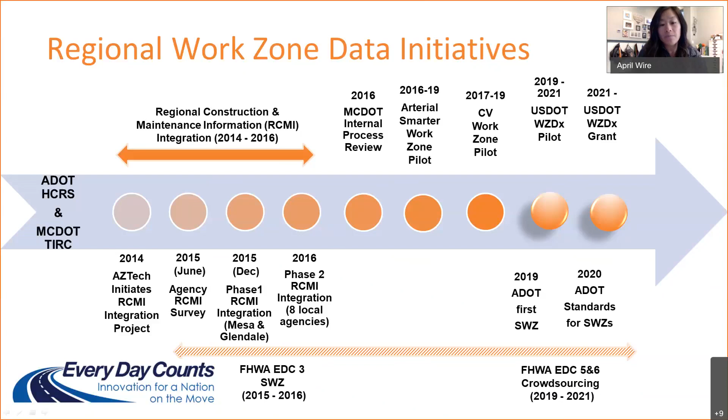As we talk about our work in the work zone space, we started working with many of our partner agencies through our AZTech platform, which brings together about 27 partners, including local agencies, cities, towns, Indian communities, universities, public safety, and the transit community, so we could focus on traffic operations, maintenance, and moving ITS deployments forward. One project we came together for was the Work Zone Data Exchange specification and deployment of a data feed ingestible by third parties.

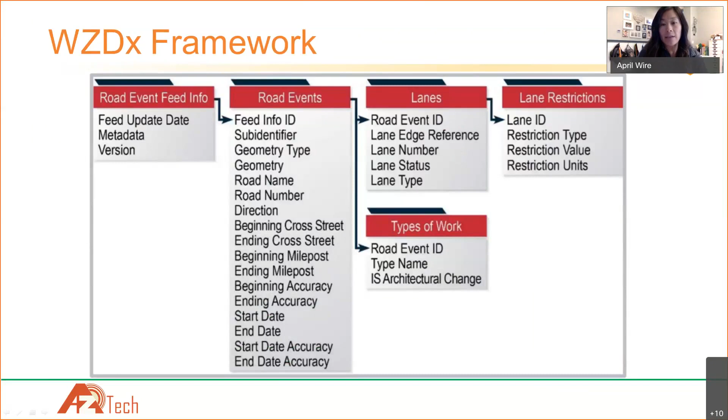In that WZDX framework, really pushed by USDOT and FHWA, here are some of the fields you'll find. It goes from basic information like where the location is, start date, end date, how many lanes are being dropped, or the status of the lanes, if they're open or closed, and any other relevant information that drivers might need as they enter into a work zone.

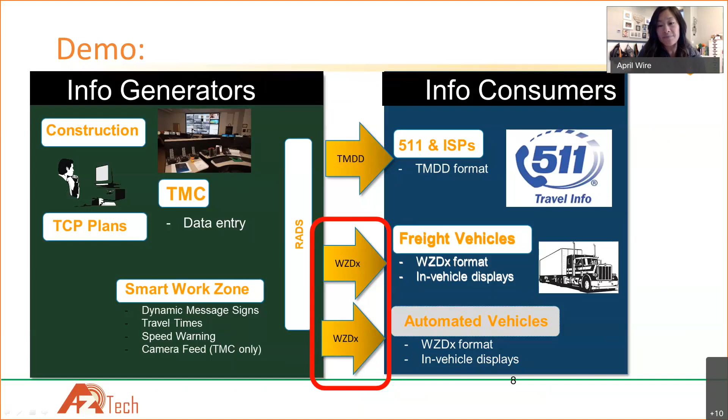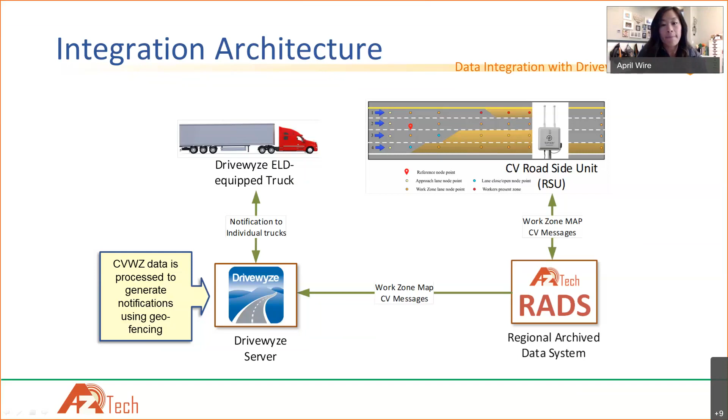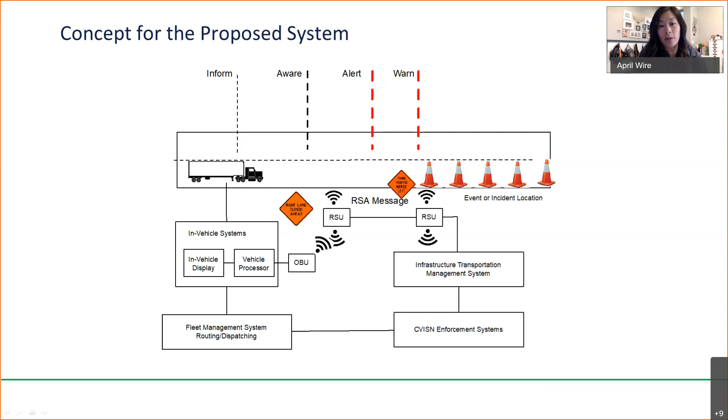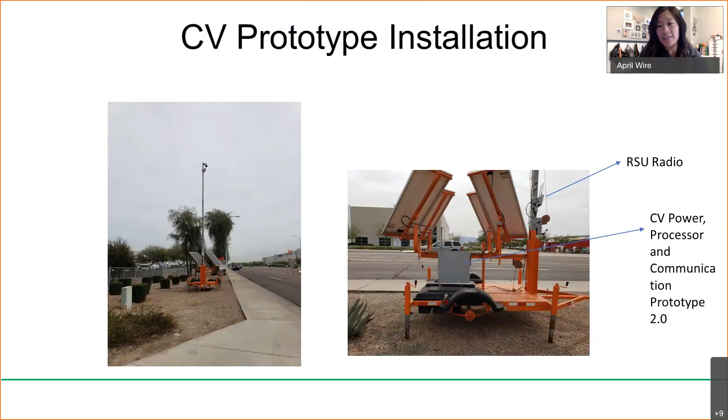There are a lot of different scenarios that we tried to test. One question always being, is the data collection required for each change in the work zone necessary, and how often do we need that information?

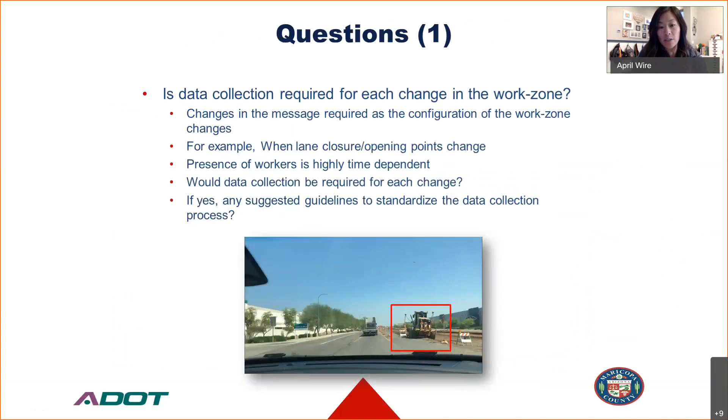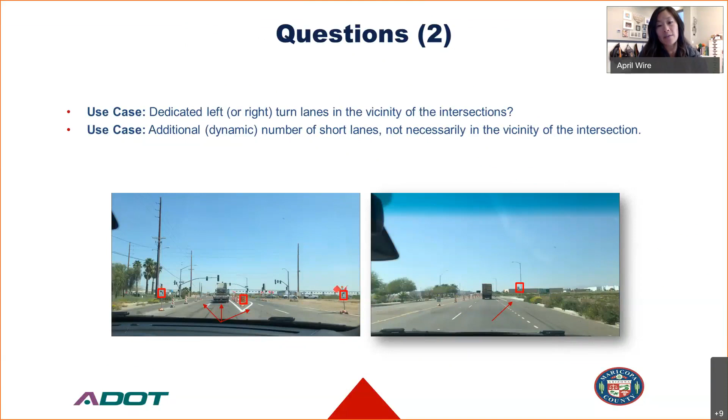And then the third question: is it a bidirectional lane or shared?

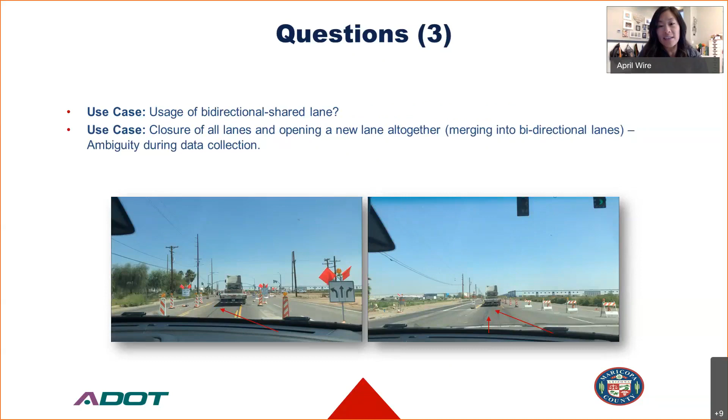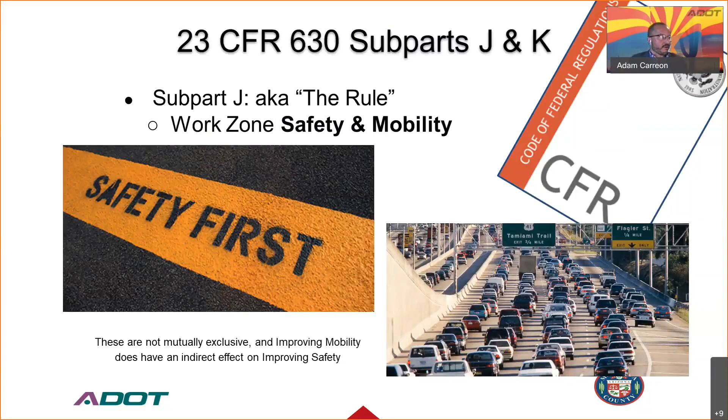So, I come at this from a work zone, actually more of a construction background, and I got first introduced to all of this through our work zone safety mobility program at ADOT. It's a federal requirement for the state DOTs. So this goes back to the backbone of how this started, at least on my end, and how a lot of states are getting into it, is the requirement for data. We want to make our work zones safer. So how do we do that? You have to collect data on them and then develop performance measures.

So the goal of collecting data has always been a requirement for, I believe, the last 14 years.

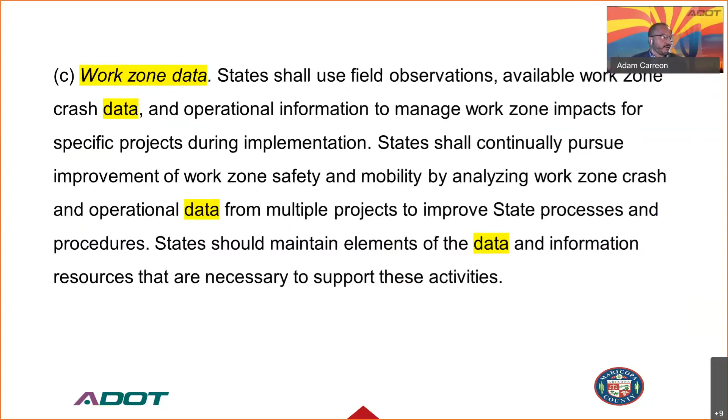So how do we then go forward? I've started presenting, and I would talk about the benefits of safety of work zones by doing smart work zones, by having data collected in your work zones. And a follow-on point for me to my initial audiences was, AVs will need the data. They'll need it at the very least to have a redundant system on what their cameras are picking up to verify what they're seeing. And so now it's almost coming around full circle where now I'm doing a lot more AV type presentations and circling back to the safety aspect. So the DOTs are collecting the data, they have access to the data, and so we need to be pushing it out.

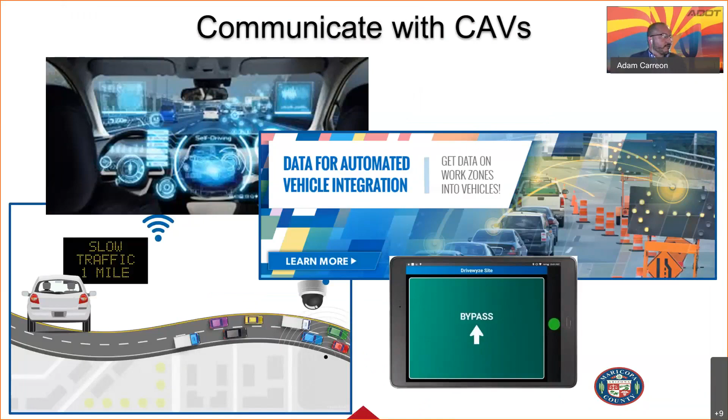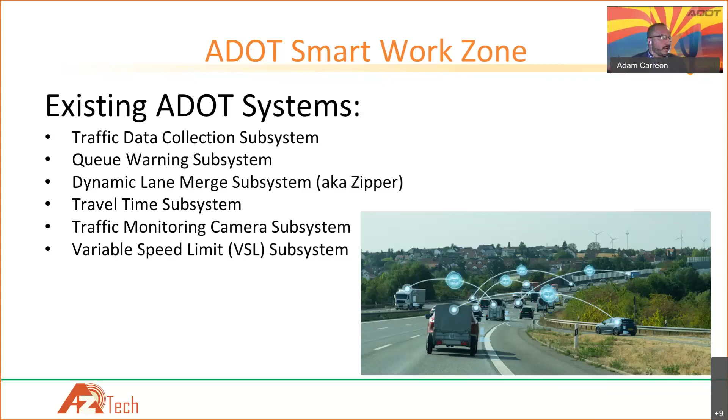So we are collecting - not all DOTs, but a lot of us are collecting data. And as far as Arizona, we're not doing a whole lot with it. It doesn't actually go to our 511 yet. We're working on those things, but we're collecting a lot of data. We've got more sources coming, this stuff is coming in very soon. The arrow board is a sign of whenever we close a lane, that's the first thing you see. So these are additional sensors that are coming through.

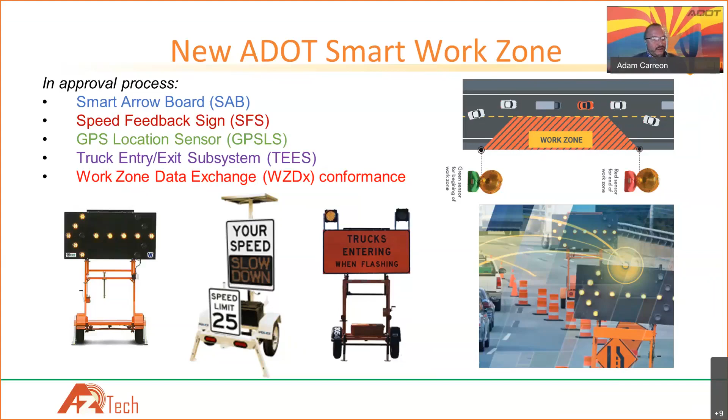So again, some states or cities or municipalities already use these systems, and then we're just trying to kind of keep up, because my thought is eventually smart devices will just become devices as they are now. Every cone, every barricade should have some kind of device on it transmitting data. And that goes to show, to temporary signals, signs themselves. The technology's out there, it's not widely used, but literally marking every single sign has its benefits.

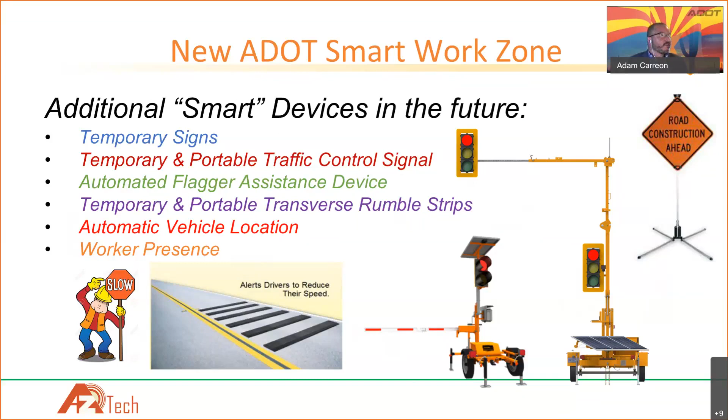The worker presence issue is a whole subcommittee within the Workzone Data Exchange, and it's got a tough challenge on how to identify to a vehicle that workers are present in the roadway. It's not 5 years out, we're talking very soon. These things - and some of these things are already out there - just not widely adopted.

This was just a resource on work zones if you want to learn more, or depending on who you're with, don't need to reinvent the wheel. ADOT has a pretty decent web page for resources.

Smart work zones have been around for coming up to, I think, two decades. And only recently has the cost come down to a point where there's no reason not to be doing it.

It's a very minimal cost, usually adding a smart work zone to an overall construction project is 1% to 2% of total costs. A lot of times you use law enforcement officers to help reduce speed, so these systems can offset those costs and sometimes be a cost savings.

There's also federal programs to help keep the costs down to the state itself by increasing federal share, through our Every Day Counts initiatives. So that's a big push for why it's becoming widely available now.

And I know it's going to probably be talked about later, but all of this data right now is still kind of not formatted to work together. The Work Zone Data Exchange is our effort to do that.

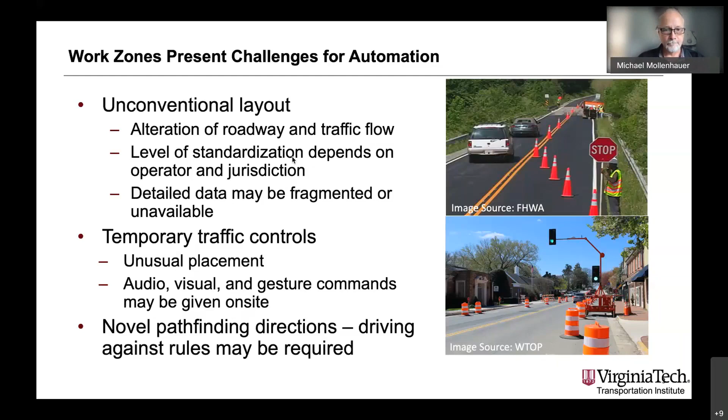When we think about the different data elements that are useful around a work zone, we're talking about a lot more precision than what has been known before, down to the locations of individual channelizing devices, where tapers begin and end, where the activity areas and the types of hazards are, including reduced speed areas.

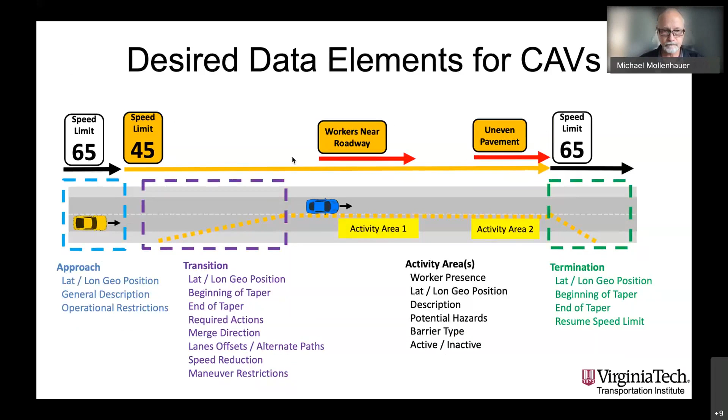These are the types of elements we're trying to build into our data production and data handling processes. I'll touch lightly on a couple of recent initiatives, and then talk about a demonstration program at the very end.

The first is called the Work Zone Builder application. It's a tablet-based application that VDOT has funded us to develop, where a work zone designer can tap out an activity area, choose an MUTCD or work area protection manual template, and apply it to that area. It will automatically place the signs, tapers, cones, arrow boards, and everything that goes into that work zone onto the map.

It also creates the underlying data structure that gets forwarded into our VCC, Virginia Connected Corridor cloud computing environment. Within that environment, as the work zone gets migrated through a set of statuses, the work zone data becomes active and gets posted. We automatically generate traveler information messages, which is the current standard for identifying where work zone features are.

We automatically generate those messages and post them to our Virginia Connected Corridor cloud computing system, and they can be accessed either through connected vehicles talking to our system through roadside units, or through a public API, so outside users and third-party application developers can access them as well.

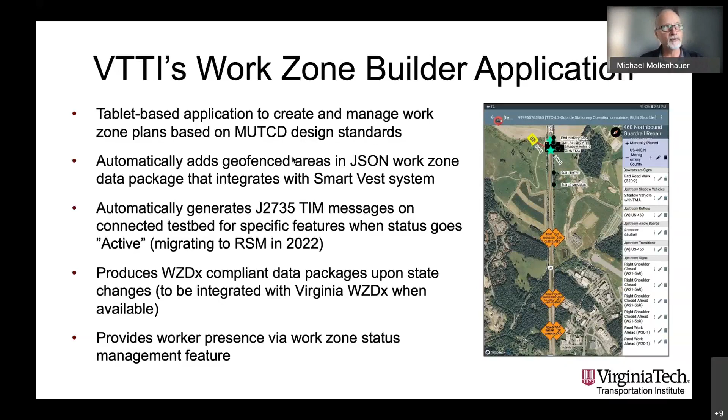Another component of the smart data system we're using to provide work zone data to automated vehicles is a smart vest. This is a wearable that, when combined with a base station, can localize individual workers to a fairly high degree of accuracy. It has RTK-corrected GPS built in, and an IMU as well.

The vest wearers communicate with a base station over a Zigbee network, and we also have a smart cone device, so individual features within the work zone can be noted using a smart cone as well. They all talk to the base station.

The base station has an RSU that communicates out to passing motorists if they're equipped with a device to receive those communications. We also push it into the cloud so that API access is available to pull that data in real time to get where the workers are.

Usually that data is consolidated down, and we provide both presence information for when workers are there and when they're not, as well as geofence boundary information. The wearers get messages either through speakers or through the lights on the vest, or through vibrotactors on an internal belt piece that goes around the waist, which can give directional signals to the user.

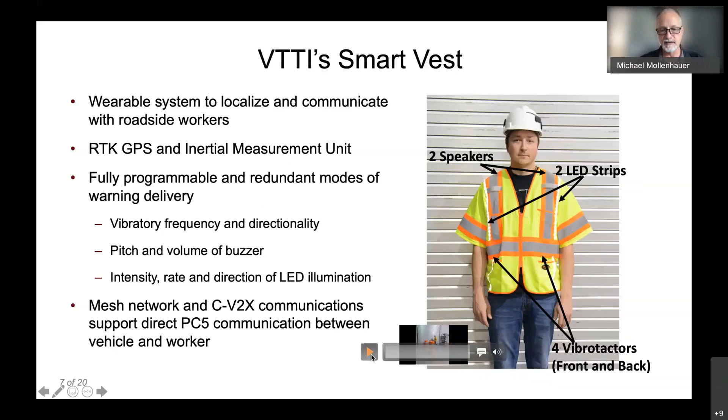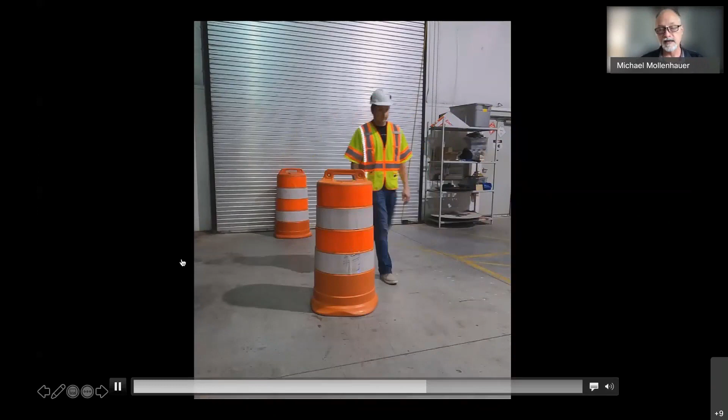We also have collision detection algorithms. If we have equipped vehicles driving through the work zone and they're on a collision course with that vest wearer, at a low time to collision, or enough time to give them a chance to move out of the way, we would give them a notification so that they would look up and become aware of the potential threat.

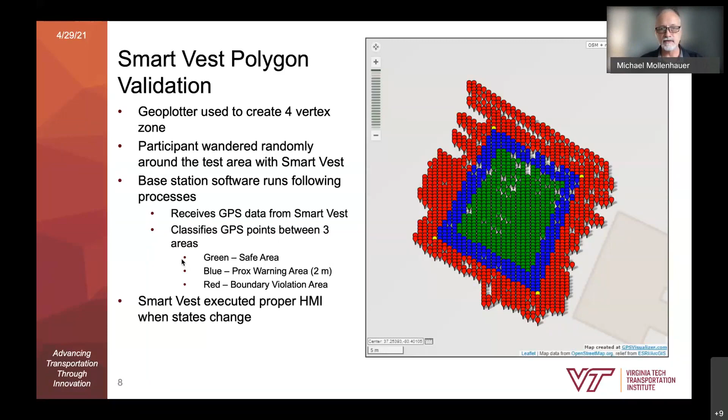The green area inside would represent what would be called a safe area. A blue area, if the wearer entered the blue area, they would get a notification that they're getting close to the boundary. And then when they're in red, they would be exceeding the boundary. So it's a fairly accurate, very low latency way to let a worker know when they're getting close to a dangerous area.

Another component we've been working with lately is the base station development. What this does, again, that's the unit you would put out in conjunction with the vests or the smart cone devices. They're all communicating data to the base station. It is broadcasting the results of that data aggregation to vehicles that are passing by, but also pushing it into the cloud over a normal 4G communication link. And then others can tap into that data through the public API if necessary.

This is all effectively being productized at the moment, meaning we're going through a process of cost reduction, boiling it down from what was a bit more of a science experiment into something that's very ruggedized and ready to deploy in typical work zone environments. That includes both the vest and the base station component. And the RSUs, of course, are off-the-shelf RSU equipment that we've integrated into the system.

We've done a recent demonstration program working with Audi, Qualcomm, American Tower, and the Virginia DOT to demonstrate this both on our Smart Road facility down in Blacksburg, that's our test track, as well as on public roads. To support that, we integrated the OBU component, or the receiver, within the vehicle and developed the software to manage the flow of data there as well. So it receives the messages about where we call a vulnerable road user, or the vest wearer, is, and then provides details to the driver about when they're approaching and when a collision may be imminent.

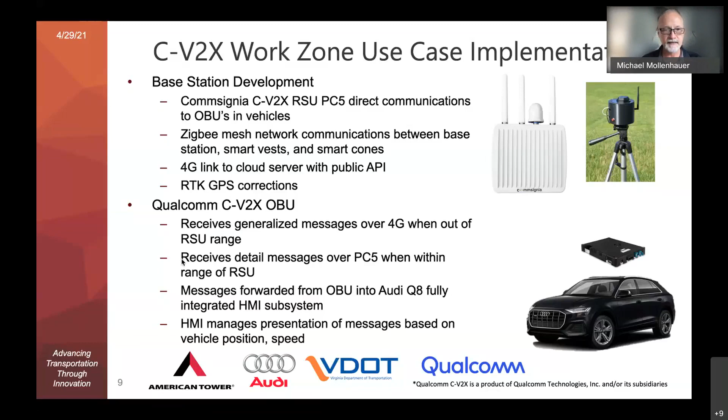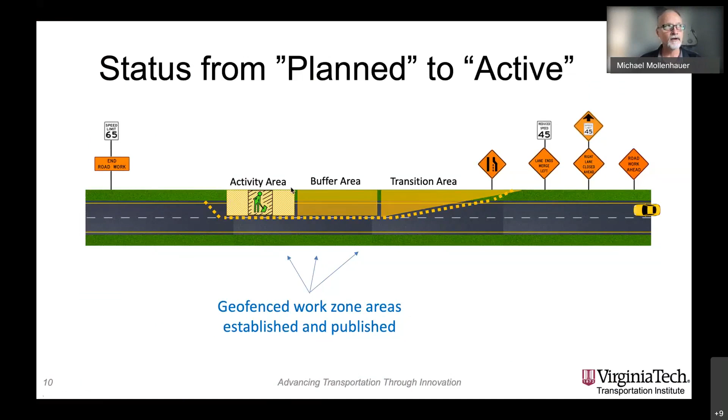So when we think about the data underneath and how it could or should be used, this is just an example of a work zone, let's say it's been designed using our work zone builder tool. From that work zone builder data definition, we can automatically generate the work zone safe areas, or areas where workers can be allowed to roam or work when they would not be getting information about being in a more dangerous area. Those are signified in blue.

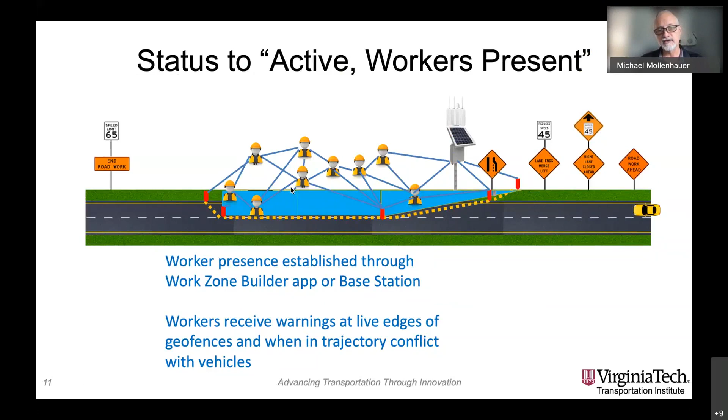As the worker approaches the live edges of that work zone, they would start to get messages from the vest about when they're getting close. And again, as a vehicle also approaches, if the vehicle is on a collision course and not following the rules, meaning maybe not reducing their speed and or merging at an effective pace for that work zone, messages could be given to the workers to give a heads up, at least to look to see where the danger might be coming from.

As the work zone is activated, we also post these traveler information messages. So again, as it goes active, if the vehicle has the appropriate equipment to receive that message, they would receive it on the instrumentation cluster, giving information that's likely conditional. We would give right lane ends, merge left, and reduce speed to 45, but only if they're not already complying with that.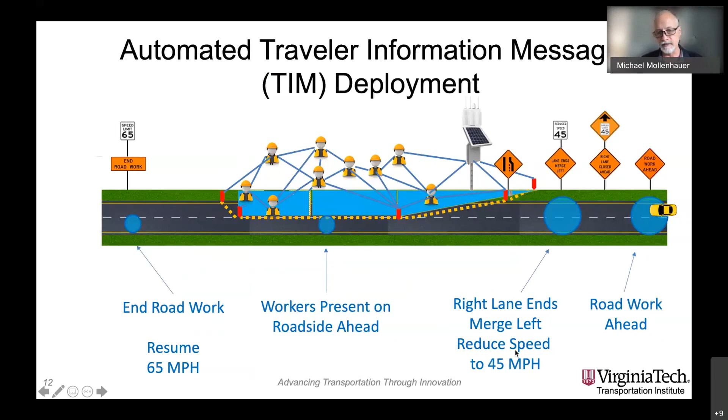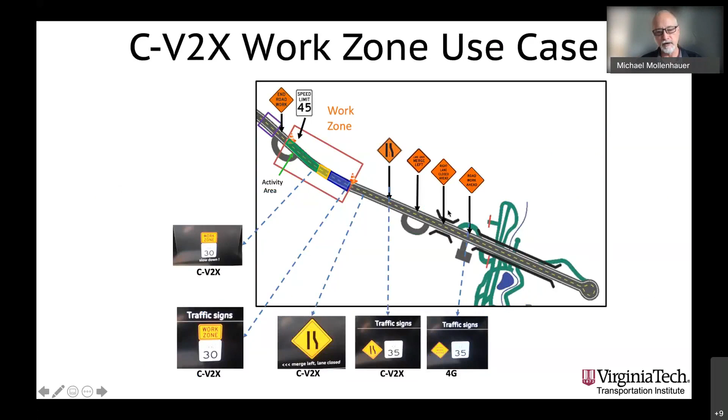This is an example of what it looked like on the real dash, and the real types of messages we used as they went through this testing process on our Virginia Smart Roads test track at our facility in Blacksburg. So those are a lot of the components we've developed.

We developed to report data and make it available at a higher level of accuracy for automated driving systems. We were fortunate enough last year to have received two of the Federal Highway Administration ADS demonstration grants that were awarded, and that was excellent for our organization.

One of those is involved in trucking fleet ConOps and automated trucking systems, in a different group within our organization. My team developed the concept around how to demonstrate safe operations of automated driving systems with public safety and maintenance facilities or workers on the side of the road. So we're looking at fire, EMS, police, as well as work zones, safety service patrol, and even towing operations.

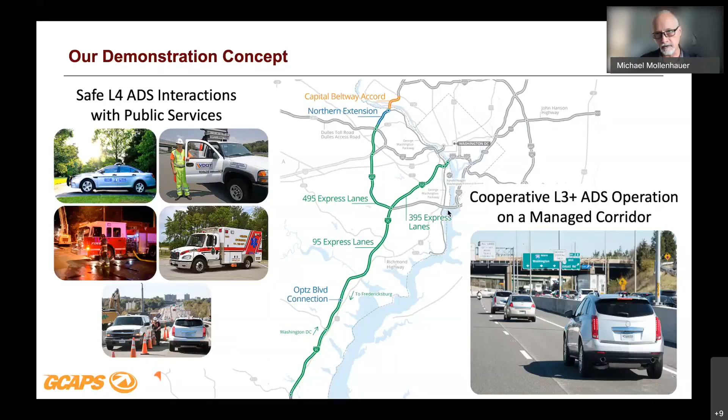Our concept is to build a level 4 automated driving system, and we're working with the community to understand the interactions often seen with human drivers, trying to understand how we're going to support those same things with automated vehicles so that the communication link isn't broken between those operating close to the road in dangerous scenarios, looking at how both the vehicle communicates to the workers and how the workers communicate to the vehicle.

We have a lot of partners on this project. Transurban operates the express lanes up in Northern Virginia, where we'll be conducting many of the demonstrations. It's a nice environment because it's a reversible road, and they shut it down for about an hour and a half to two hours in the middle of each day, which gives us a great chance to test everything when there's no traffic to worry about from a safety perspective. They're a good infrastructure owner-operator partner, and we'll be operating many of the infrastructure-side systems for the project.

Our Global Center for Automotive Performance Simulation will take the data we collect as we operate these demonstrations and turn it into simulations and scenarios distributed to a variety of ADS developers and communities who want to use it for training or to improve ADS algorithm development. Regardless of how they want to use it, all that data will be made available for years after the program is complete. We're working, of course, with OEM partners as well.

So we have the Crash Avoidance Metrics Partnership, and a number of OEM partners involved. They're helping us define the scenarios they feel are difficult to achieve with today's existing technological solutions, and we're helping figure out what the interaction looks like, the task analysis for what the worker needs to accomplish, and how the vehicle should respond in a variety of scenarios.

We also have public safety professionals we're working with. We're doing a lot of focus group activities, getting early feedback on the technologies being chosen, both from a perspective of practicality and how useful they think it would be, and how we can tweak it to make it a more efficient system.

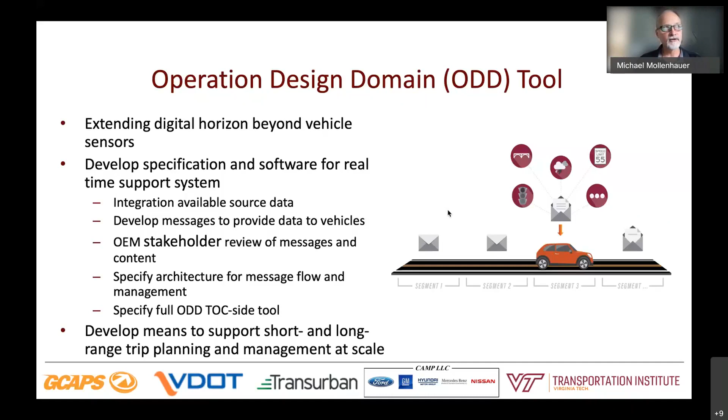Another component of that is we want to be able to allow the ADS to query that information when it's not actually on the roadway. So maybe it's sitting in the garage and somebody's doing trip planning and they want to understand if they can get downtown through a particular corridor, and they would be able to pull that information before they ever get on the road. So it does help improve the digital horizon effectively for that vehicle, so they can look out further ahead and do better planning for what they're about to experience.

I mentioned before that we're working with our public safety professionals to understand how they interact with vehicles today, so that we can apply some of those same rules to the ADS. We've created a variety of scenarios that we think are very, very challenging. Even something as simple as a traffic stop might be really challenging - if there's no driver to respond to the officer, and no communication between the vehicle and the officer, how does that officer know that they're going to be interacting safely?

So we're trying to develop solutions to communicate with the officer, to exchange data with the officer, but then also have the officer have the ability to release that vehicle when the stop is over. That's just an example, but there are a variety of different scenarios that we'll be working through, including work zones and flagging operations, and how do we handle things like hand gestures, and give everybody the comfortability that these things will be done in a safe manner.

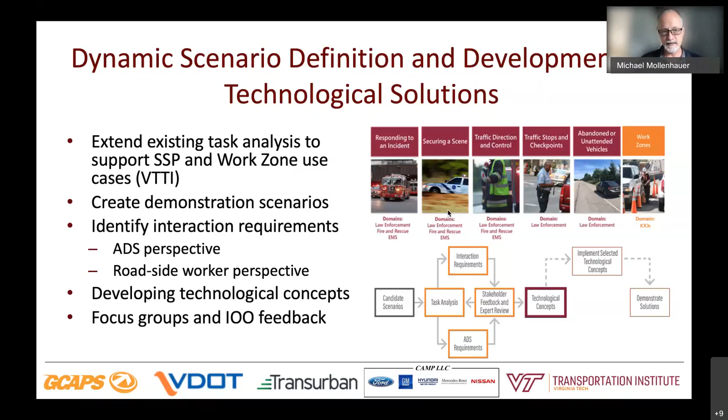I mentioned we're building up the vehicle. We're doing that using one of our test vehicles right now. We will be purchasing a dedicated vehicle for this shortly, and we're using the NVIDIA Hyperion and Drive software suites. It's a really fun exercise for our team to be able to get our hands on these tools and develop them.

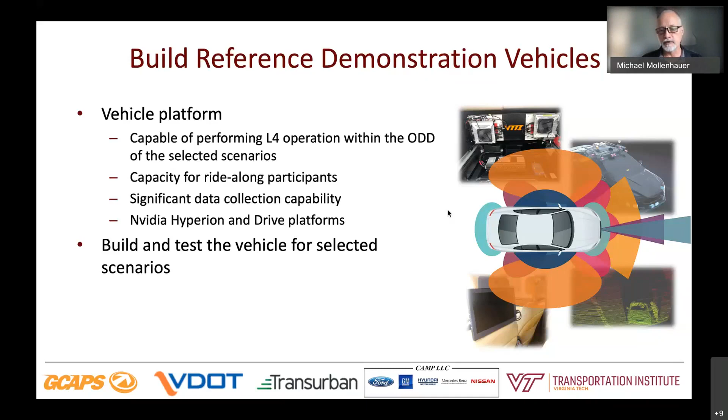Our vehicle is currently operating fully autonomously on our test track facility, so it can drive itself to wherever it needs to go on that facility and do it safely, including both lateral and longitudinal control and response to objects. Where we're at now is that we're starting to develop some of the specific technical solutions that will be bolted onto that vehicle to support the interactions with public safety and work zone operations.

So we're going to be designing and conducting demonstrations. Most of this will occur just south of the Pentagon on I-395, I-95. Middle to end of next summer is kind of our target date. We've done other demonstrations of automated vehicles along that same corridor, and it's a really nice area because we can get people from DC, lawmakers, DOT professionals, and there's fairly good access for folks who want to come out and experience it live.

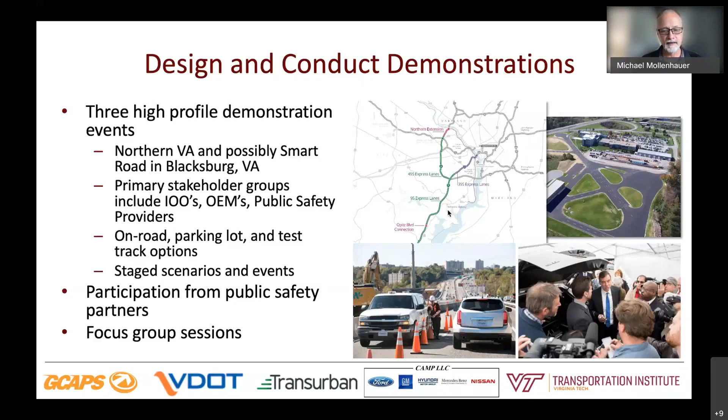We'll also be doing some of them that aren't as safe, which we'll conduct on our test track facility where we can control the conditions and interaction with public traffic a little bit better. So there'll be a wide variety of focus group sessions trying to elicit feedback from those who are out witnessing the program and riding along. And I mentioned before, we'll be processing this data once we are collecting all aspects of it.

So almost everything that's out there will be instrumented at some level with devices to position them. There'll be sensors, cameras, things like that to be able to capture this data. That will all be made available through a public data portal in the future to allow others to use it for maximum benefit. So we look forward to completing that program, and many of the technologies that we've started working with and developing with VDOT will be incorporated into that program, hopefully fully functional and maybe at a more production level by the end of next summer.

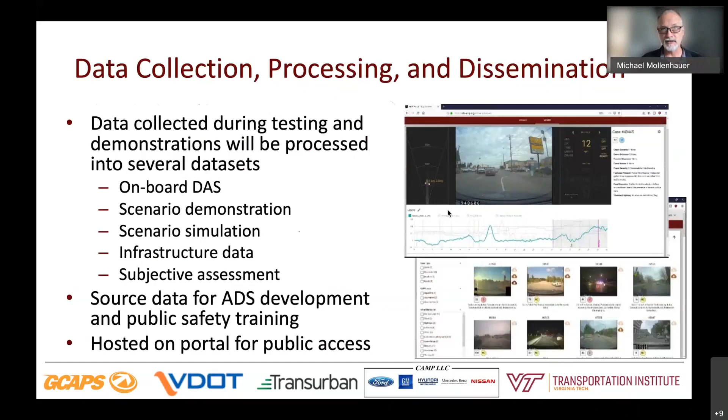So that's what I had to tell you about today. Thank you. And I guess it sounds like we're waiting to take questions to the end. Yep. Thank you, Dr. Mollenhauer. I appreciate all the wonderful information that you provided today.

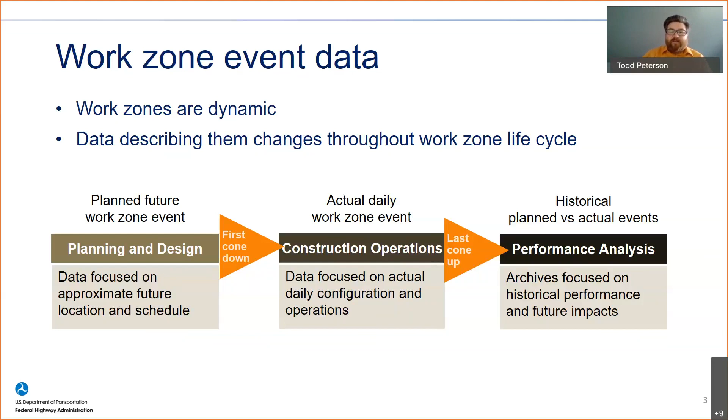Similarly, we mentioned stakeholders. There's a broad range of stakeholders using this data for different purposes, and they each have their own priorities for what's important to them. So in considering a framework for work zone event data and a common specification to go along with it, we had to keep that diversity of the stakeholder audience in mind, and what information needs to be part of that specification.

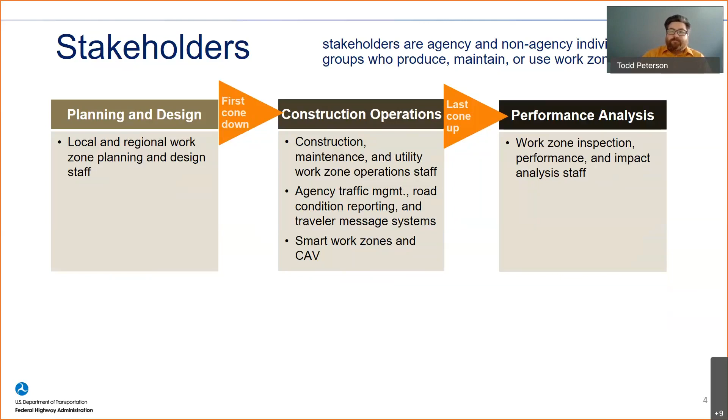As we tried to document an actual framework for work zone event data, we wanted to approach it with knowledge of those uses and stakeholders in mind, with sensitivity towards how this information is currently being utilized. So the framework we developed looks at these individual use cases, individual data flows, and tried to remap some of these processes around the notion of what we're calling here the work zone event data warehouse.

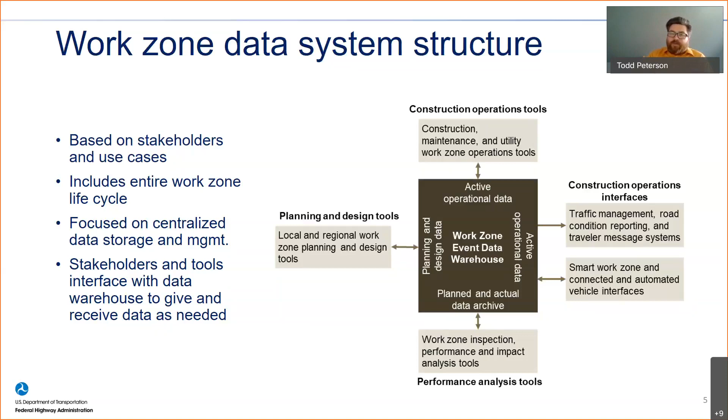Again, this is a simplified idea of what that architecture looks like, but the next slide is going to broaden this out. I'm going to show you the whole architecture here. I'm not going to go through this bit by bit. I know this is a lot to digest in one slide, but I want to show this for two reasons. One, if you actually sit down and follow this, you can follow the architecture to see how data enters the system, reading left to right, and then coming out on the other side, you see the various use cases for how the data is being utilized.

This architecture represents, again, not new processes that we're documenting here. These are existing, accepted, well-established processes used by current agencies managing work zone activity and operations. There's nothing on this list that your agency isn't already doing, probably, but it is a remapping of those ideas around how all that feeds from, and utilizes, a centralized work zone event data warehouse. So this architecture is a good reference point for agencies trying to understand how what they do today can be adapted into a work zone data friendly process.

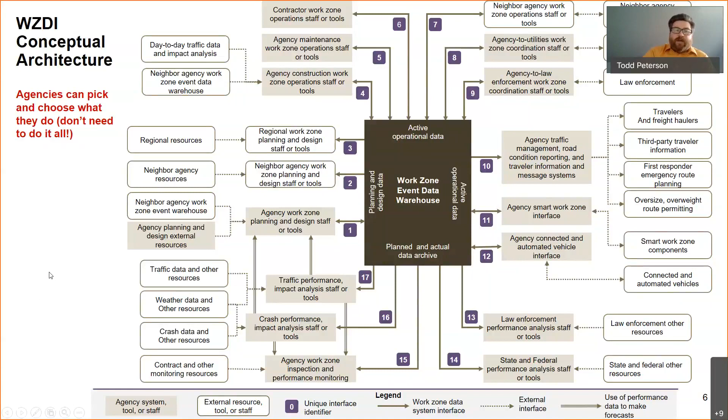So that's what we'll be looking at. There'll be a lot of outreach, and opportunities for peer exchange, not just with the grant participants, but also with other agencies that are working independently with their own work zone data system architectures. That's coming up, and we're anxious to kick those off here in the near future.

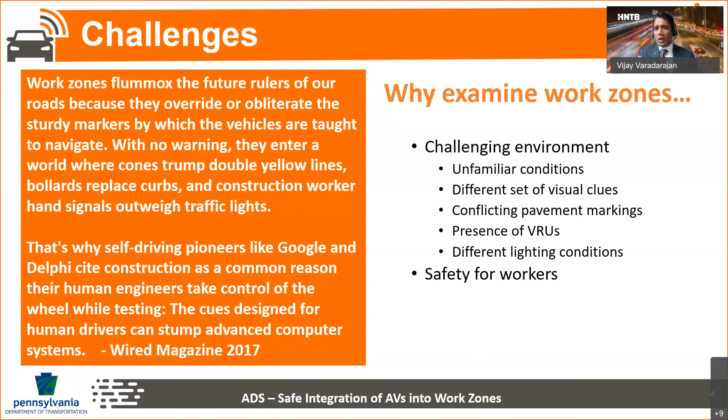So why did we choose work zones? Mike talked about a whole lot of reasons, and we chose work zones for the same reasons: challenging environment, unfamiliar conditions, different set of visual clues, conflicting pavement markings, different lighting conditions, and safety of workers, among many more. That's why Pennsylvania picked work zones as a topic to investigate how we could safely integrate automated vehicles in work zones.

So we took a three-legged approach: connectivity, machine visioning, and HD mapping. Let me talk about each of those real quick. For connectivity - can we improve AV operations in work zones if we have connectivity between the vehicle and work zone artifacts like drums, cones, and workers? Will that make AV operations safer?

The second leg we took is what we call machine visioning. What we are trying to investigate there is: if we have different kinds of coding on the pavement, on work zone artifacts like drums and cones, or on the workers, will the AV be able to 'see' those artifacts better so that it can navigate the work zone better?

And the third leg we're looking at is HD mapping. Can we generate a map of the work zone in a specific format and disseminate that information to approaching vehicles in real time, so they know what the work zone looks like, what they're going to encounter, and decide if and how they can safely navigate that situation?

So the vision for this project is to enable AVs to safely operate in work zones without human intervention. And the mission is to reduce fatalities and increase mobility for all road users in work zones.

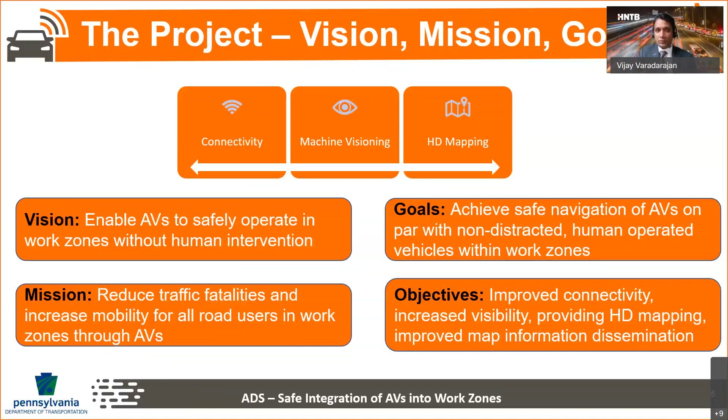So we just started on the project. We had the kickoff early this year, around January, and we are literally starting this project now as we speak. But the approach we're taking to accomplish the goals is a three-phased approach.

During phase one, we are going to plan for the deployment and testing. During phase two, we are going to actually deploy and test whatever we have planned for. And finally, in phase three, we will evaluate how different things worked based on our project.

The phase one planning, we anticipate, will take approximately one year, with a total of 13 tasks. And you'll see the V diagram - if you're in an ITS meeting, you've got to see this V diagram. If not, many ITS engineers will not be satisfied, so I want to make sure I make a lot of ITS engineers happy, so I threw it in there for you guys.

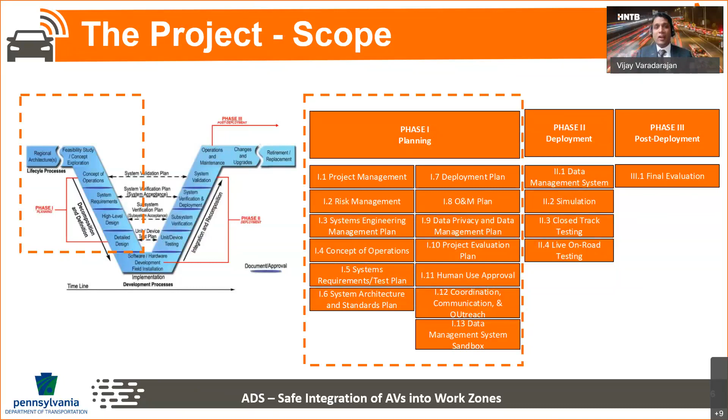So we are going to follow the systems engineering process, and during the planning phase we will have a total of 13 tasks, starting from project management, risk management, SEMP, ConOps, requirements, architecture, through the deployment plan, operations and maintenance plan, data management, and so on. During phase two, which we'll talk about in more detail, there are 4 tasks. And then in phase three, we will do the evaluation of phase one and phase two deployment.

All right, so the deployment phase two. How are we going to do the deployment and testing? We're going to do it in three phases. In phase one, we are going to simulate the work zone scenario. In phase two, we are going to do closed track testing for the simulated work zone scenarios. And in phase three, we're going to do the testing in the live on-road environment. So those are the 3 phases we're going to go through.

And the way we do it is very similar, very simple. We will set up the work zone, map the work zone, process and upload the map into the vehicle, and conduct the simulation. And then once that is done, we will move on to the next phase of the track testing.

And for this, we are going to use CMU, which is one of our project partners. They have their own level 4 CAV vehicle. So we are going to use that vehicle for the closed track testing and the live on-road testing.

And what we're envisioning is that Penn State, who is another project partner, has another vehicle which can map the work zones. That vehicle is going to map the work zones and upload that information into the map database. And then that map database will either upload the map to the CMU vehicle, or it could come from the updated map database, or in real time, we could see if we could upload the map through the DSRC or CV2X connectivity.

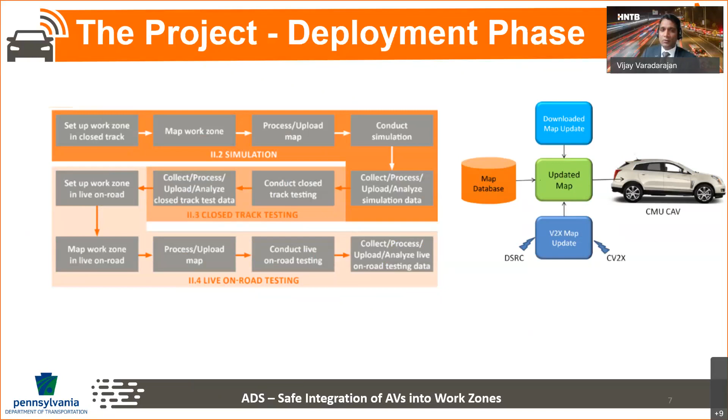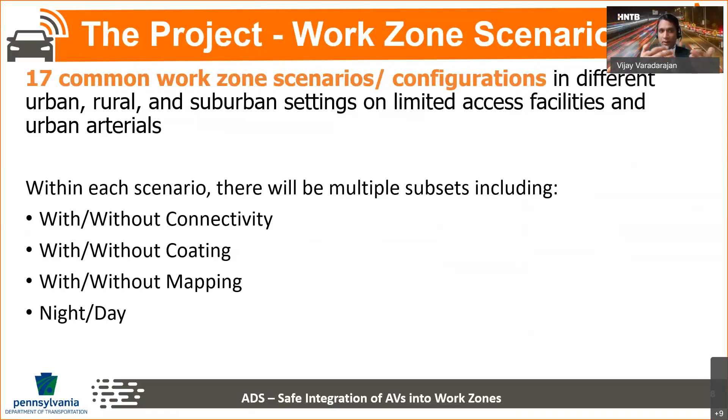So the next question comes up: how many work zone scenarios are we going to consider, and what are the different subsets we need to consider? I talked about the 3-legged stool of connectivity, coating, and mapping. So do we need to do all these 3 to improve the operations, to achieve par with human drivers? Or can we get away with just connectivity, or coating, or mapping, or some combination, so that we can have AVs operating safely in a work zone on par with a non-distracted driver?

And obviously, we need to look into both daytime and nighttime scenarios. Now, for all those who have worked in work zones in Pennsylvania, we use a term called PATA, P-A-T-A, as a quiz question to all the participants to see some chat going here. Can anyone tell me what PATA stands for? I'm going to see if there are any responses. If not, I'm going to tell you at the end of a couple of slides.

So there are, we could look at n number of work zones. If you look around the country, there are hundreds if not thousands of typical work zones. So what we did is we looked into PennDOT to see what are the top 20%, even though we have many work zones, are there some typical work zones that are implemented 80-90% of the time. So we worked with PennDOT to come up with 17 scenarios in different categories like short term, long term, mobile, freeways or expressways, whatever it is. So we came up with 17, and we wanted to see how the AVs will operate in these 17 work zone scenarios.